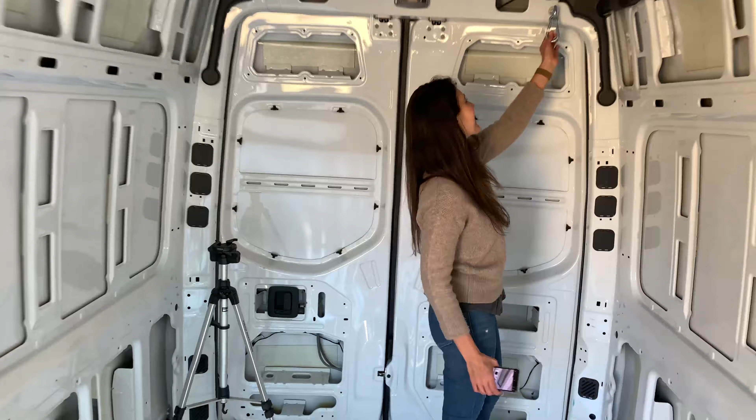So what do you want to talk about, Ann and Banana? I don't know, I didn't know this was here. Well, that doesn't have to stay here. This is to hook a hammock to. While I camp in the thing by myself.

Okay, what's up doggy? This is it. It's pretty boring right now.

So you might be asking yourself, why white? Well, when you're looking for a 4x4 Sprinter van, you take what you can get. If it was pink, it would have been pink. Purple, it would have been purple. It's really hard to find a 4x4 Sprinter van, especially in a 170 wheelbase. So if you could find one, regardless of the color, try to get it, because somebody else is going to be there with a big fat stack of cash who's going to put it over top of your bid. So just be ready.

And white, here's the benefit with white. White does not collect heat nearly as badly as a black vehicle or a gray vehicle, or what I like to call a sexy colored vehicle. White is better for heat. And since we're out here in the high desert, it's pretty important to stay as cool as possible, right?

So we did opt for as few windows as possible, with the idea that we would put in the windows that we need. We're gonna put in a couple small acrylic windows. And with acrylic, you don't get as much radiation coming through, so it's a bit better than a glass window.

So we just put this ladder, and we got the rack half installed, and we're gonna go ahead and put some solar up there. The ladder is from a company in Washington called Flatline Van Company, and it's very reasonably priced. It's about half the price of an Aluminess, and even cheaper than some of the other options out there.

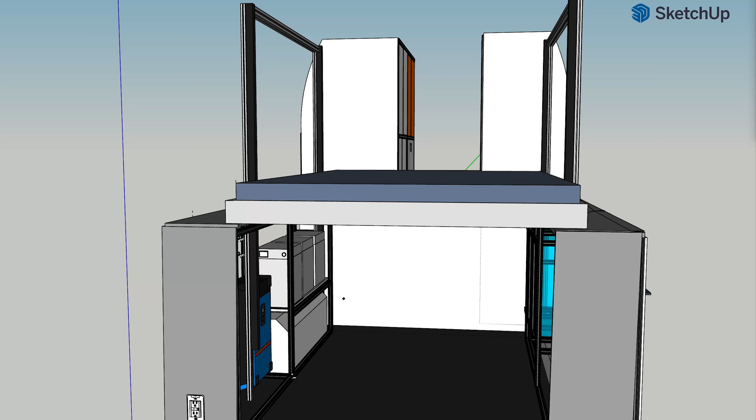The whole design we're doing in SketchUp, and I'll show you a little bit of it as I talk here. What we're going to have over here is our trunk section, all of our electric to one side, all of our water to the other side. Past the trunk section, we're going to come into our galley, on the passenger side of the van.

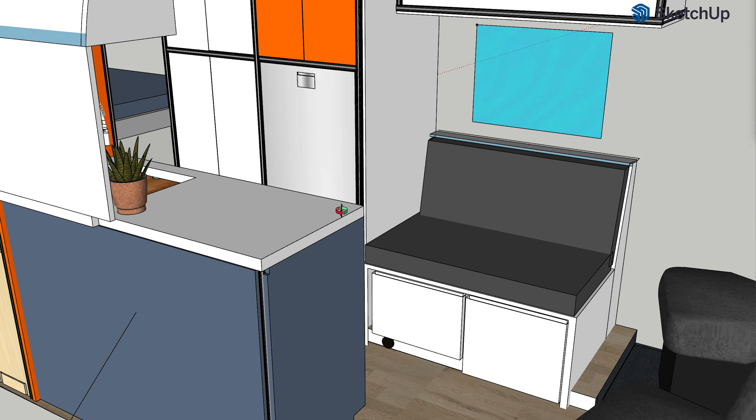We're going to have a sink. We're probably going to do an induction cooktop that just hangs out in a drawer when we're not using it. On the driver's side of the car, we're going to have our fridge, and we're going to try to put it up as high as we can so we don't have to bend over. We're going to have some closet space beside that, and then a seating area with an overhead above the seating area.

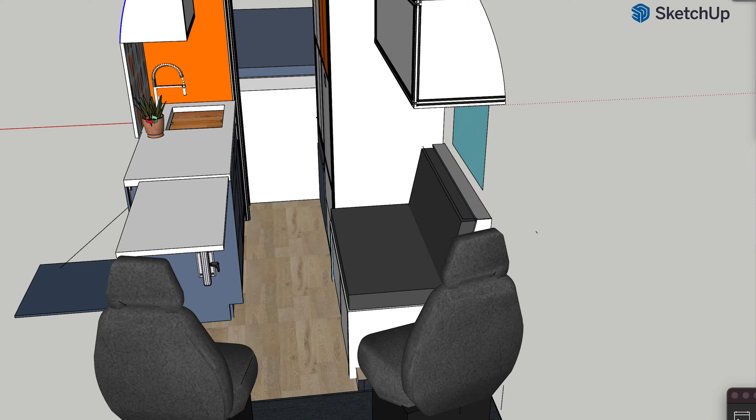On this side over here, we are looking at doing a bench facing towards this door that opens, but it would have a Lagun table so we can have seating in this whole space. We can move the table to different spots throughout the van, which would add some additional counter space, or be a desk space for somebody working from home over here.

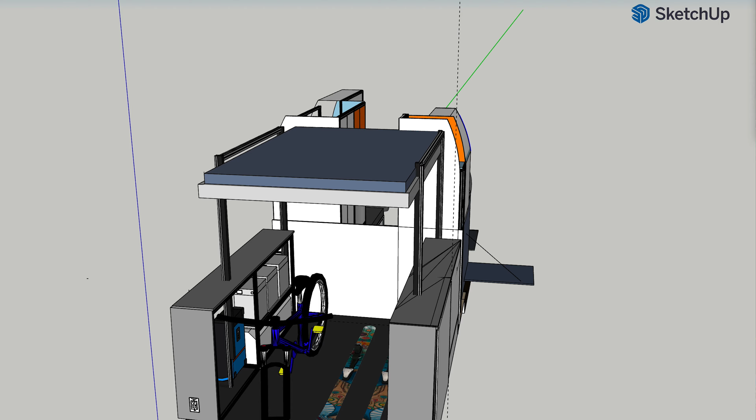Everything in this van, because of that dirt bike space, we need everything else to be as efficient as possible. Being able to have that garage space where you can put not only the dirt bike - that's Mike's thing, he definitely wants the dirt bike there - but for me, I want skis in there, I want a bike in there, other outdoor equipment, but not the dirt bike.

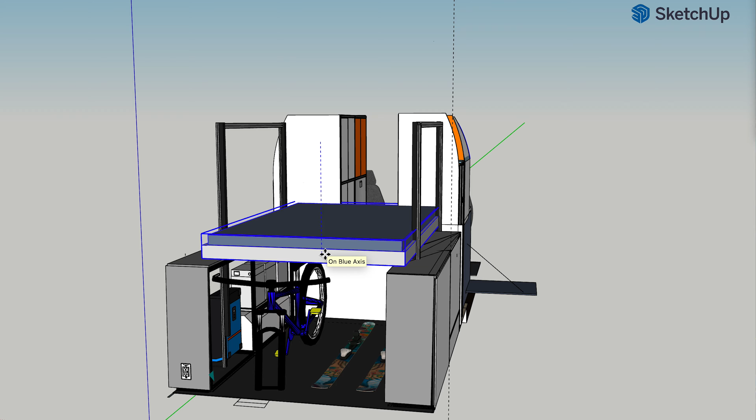Your skis can be up to 85 inches long and tall. I want the longest Nordic skis they make. So in order for this all to work, the other really cool thing we're looking at doing is a lift bed. We're looking at the Happijac brand to do that, but that'll be in one of the next couple of builds because we just heard it's on its way to our house, so we should be getting that very soon, which is pretty exciting for us.

You can see how that'll all come together. Definitely a lot of unique things in this van compared to a lot of the other ones we've seen. Now, we will change this as we go - if we run into any snags, we can't do this or that, we'll adapt. But this is what we're looking at right now.